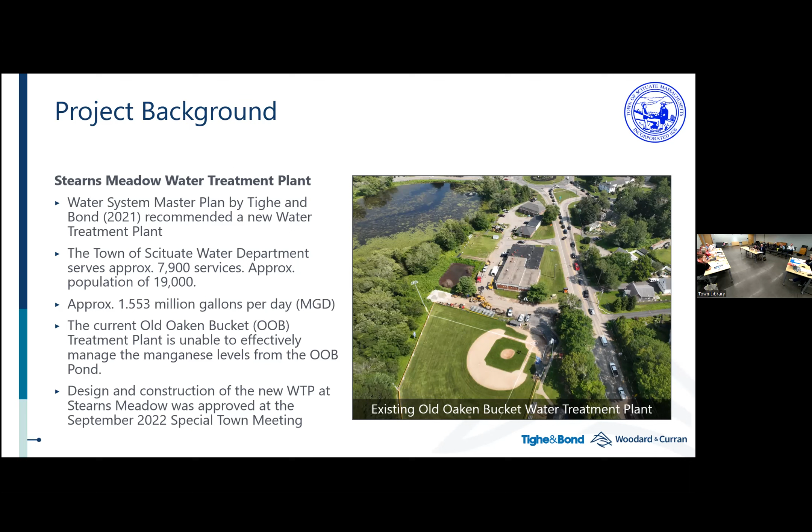Our treatment plant performance objectives: the permitted average flow, and this is for the withdrawal from the existing Old Oaken Bucket reservoir, is 0.79 million gallons per day. The treatment plant design capacity is 3 million gallons per day. What that means is there are some days when we can take more than that permitted average and other days when we'll have to take less. The design is obviously to meet all EPA and Mass DEP water quality standards with appropriate redundancy and resiliency. Included in that is the ability to push kind of a peak flow through the plant, producing that 3 million gallons in 16 hours, and that's to accommodate staffing and also kind of the peakiness, if you will, of the demand in the system.

As a building overview, it's about 35,000 square feet. It has 3 main components: the treatment process area, operations functions, offices, and a 5-bay equipment storage garage. The building itself is also subject to a ZBA special permit hearing, which is at Town Hall tonight.

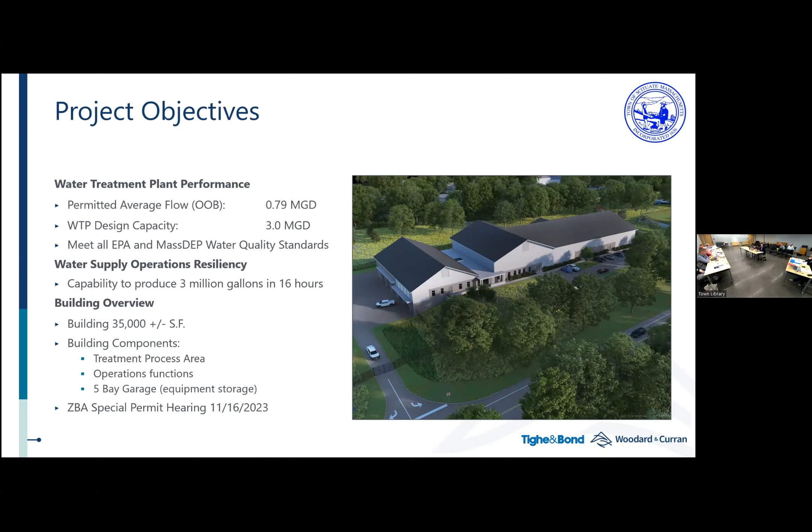We did, and I'll get to this a little bit later as well, look at other revisions to the disturbance in this area, even with tightening up the grading. Right now it's a 4-on-1 slope per Scituate code for this sensitive area. Even if we were to go to 3-on-1, we're still 40 feet from the property line, so we're leaving that grading as it is. That's temporary disturbance during construction with revegetation planned in that area. And this area is quite a distance from the buildings.

In terms of overall timeline, we appreciate the discussion we've had with the public and the board. This is our third public hearing date, and obviously with the quick turnaround here between the October and the November meetings, that's why you have the package that you received today.

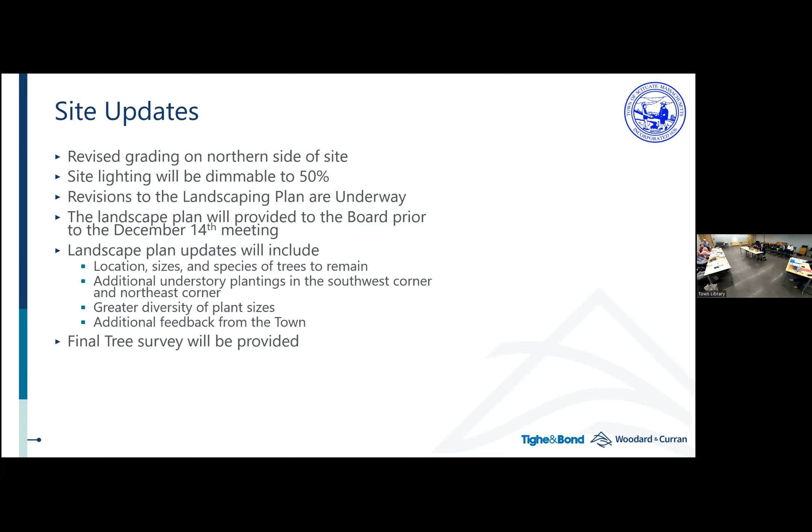Those landscape plan updates will include, again, the location, sizes, and species of those trees that will remain outside of our limit of work, and where we are proposing new plantings that'll include some additional understory plantings, especially in that southwest corner and the northeast corner where our disturbance is closest to the abutting properties. A greater diversity of plant sizes, so it has a natural appearance of woodland transition from meadow to woodland. And some additional feedback in terms of species and composition that we've received from the town. And that final tree survey will be provided. Again, we received that this morning.

That's a summary of the updates that the board sees in a combination of this packet and the next submittal that you will receive, but we wanted to show some of the work that we have been doing in response to the board and public comment.

Yeah. All right, so I did briefly look at the plans today, and I think the major issues for the board, obviously the landscape plan hasn't been done, that's going to be resubmitted. They put in the separate basin for the dewatering. How big is that sump for the dewatering? And so we'll condition that the sump for the dewatering cannot go into the sump for the stormwater. That's fine. How big is the sump though? It's 33,000 cubic feet. And how big is the stormwater one? It's larger.

Okay, that's the temporary stormwater basin there. Okay. And how much dewatering water will there be? That, again, is also partly up to the contractor's means and methods and how much and how deep they want to go before they place the slab and the duration of it.

The soils there are fairly tight. That's part of our challenge with stormwater and why we have the limits of disturbance that we have on the southern part of the site to get the infiltration that we need. So we don't expect that it will be an unmanageable amount of flow. I guess I asked that question last time. It doesn't sound like I got any better answer than last time.

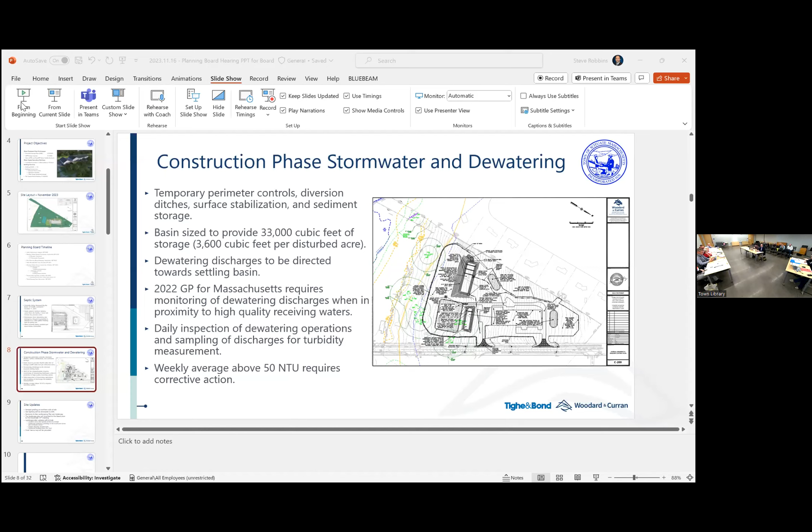Slide, just want to make sure I had it. And this new dewatering sump is in the approximate location of a permanent stormwater feature too? It is. So you're not going to dig in to the depth, you're going to make it shallower? Correct. Is that what you're doing? This area here, yep. Can you blow it up? I'm sorry, my eyes aren't that good. Unfortunately, I don't know that I can in this view, but I'm happy to get up to the board.

This is that dewatering basin, and the overflow conveyance that we're talking about is coming to here. So that looks like a point discharge. How does it get spread? I mean, at 1,000 gallons a minute, that's a lot of water. Sure. We have the outlet protection with the riprap here, and that heads down the slope.

Steve, wouldn't the outflow be limited by pump rate? Absolutely. Okay, so if the pump wasn't capable of over 1,000 gallons per minute, could you discharge more than 1,000 gallons per minute? No. Okay. Can't get to the basin.

So how are you gonna make sure no sediment gets out at that riprap outlet? So the Massachusetts general permit requires daily monitoring of that outfall. It's observed by inspectors on site, and when it's not in compliance, if there's erosion. And I should mention that downstream of that outlet is our silt fence and erosion control barrier for the work. So we're not discharging it freely before it leaves the site. There's an additional level of containment on the site.

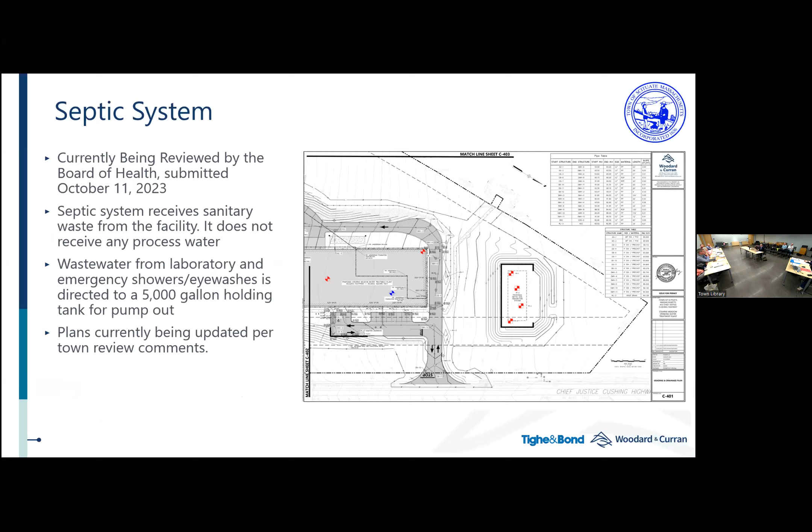Mike Gibson, Milford, 2 Old Forge Road. So the admin building right now, it is a historic building, it's not gonna be knocked down, everything else will. I talked to the town administrator, similar presentation at capital planning, so that's helpful. So the buffer, the non-disturbance zone, you mentioned tonight, Mr. Robbins, that it is possible to do 40 feet down by my house, but we're not entertaining that. I know 10 feet doesn't sound like a lot, but right now I have a forest behind my house, so 10 feet would be a significant difference, a 30% increase from what you've given me right now. So I would be interested to hear more about that. We're more concerned about the buffer right now with 3A than the neighbors. So a couple questions.

My question for the board, last meeting I raised many public meetings where the applicant stated that nothing would be disturbed within 50 feet. It's obviously not what they're presenting now, so I'm curious if the board plans to hold them to the 50 feet. There's a little confusion on that issue. I've talked to the town administrator on this. He said he made no promises for a 50-foot buffer. Some of this was done before the actual design of the stormwater system. There is no requirement for a buffer in the bylaw. There's a 30-foot building setback, and they're not going in the 30 feet except where the cemetery is. The town administrator said he did not make that promise, and it was before the building was fully designed and the stormwater system was designed.

No, I'm aware of this, nothing will be done within 50 feet. So no one went back and looked at the recorded meetings that I mentioned. I gave some quotes, they were direct: nothing will be done within 50 feet. I sent an email to the town administrator and asked him to comment, and he told me he made no promises that it would absolutely be 50 feet. He said they would do their best to make as big a buffer as possible. Okay, so it's July 13th, 2022, August 23rd, 2022. I sent him the times that you said. I'm aware, I'm providing it for the board in case they want to look as well, because Rob Little from Woodard & Curran was another representative who made those statements. I'd like to know what's gonna be done with those comments.

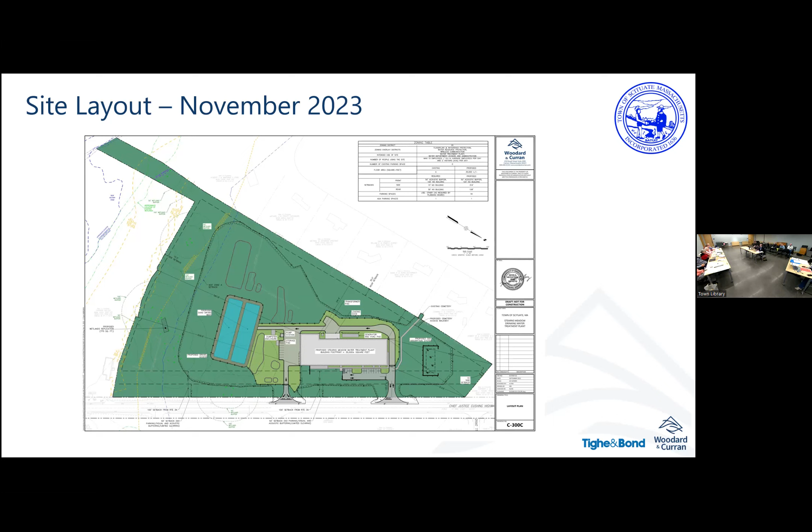Could I just ask a question, because I'm going back to the difference between 30 and 40 feet. Remind me what you said would have to happen to get to 40 feet from 30. So the grading in that portion of the site is designed with a 4-to-1 slope, which is what the town requires in the watershed protection code. So you'd have to make it steeper. Yeah. That's how you tighten up that slope by a few feet, but it requires the grading to not comply with town code. And that's right in the zoning bylaw, that it's supposed to be 4-to-1. No, I don't think we want to change that.

Can I ask one follow-up to that? Sure. Is it possible to push it 10 feet closer to 3A? Push the design? No. Not without increasing the slope to 3-to-1 on that side instead. Or, let me get back to that, I don't know if I have.

I don't have it. Did we ask Mr. Kasha what happened at his meeting? No? No. Okay, never mind. So anybody online, no? I don't see any hands online. Do we have a piece of paper that says continuing? You do. Are you all done?

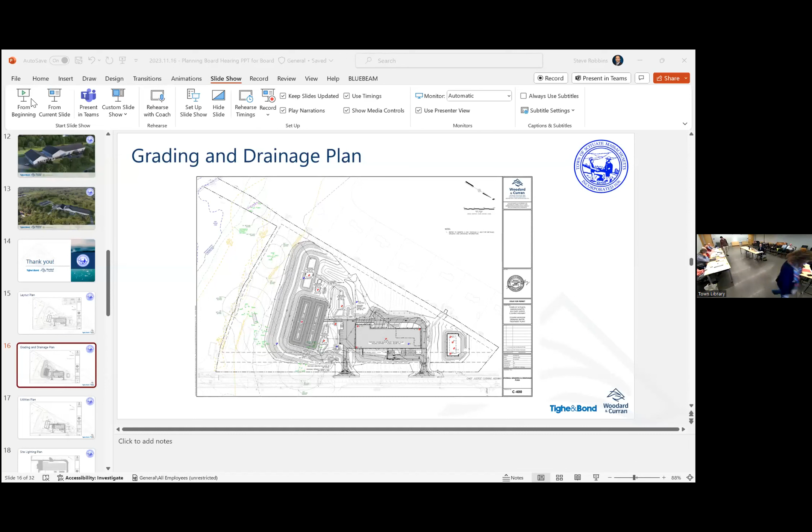So the next contested area is just on the western side of the site where the limit of work goes to the 30-foot buffer. So that's 30, and the limit of work comes almost perpendicular to the elevation lines. How does that then change the overall grading of the site if you're pushing away from the abutter's property by 10 feet to make it 40 feet, or 20 feet to make it 50 feet?

Can you repeat that? I just want to make sure I'm following the question. Well, so the limit of work, that's kind of in question. I'm gonna point up here just so I'm making sure I'm following. This area here. Yes. Because if you push the limit of work closer to the proposed infiltration pond by 10 or 20 feet, it's running perpendicular to the elevation lines. So how would that then change the grading of the basin, the site?

Because then we would have to tighten up this slope to be able to meet those existing contours. Okay, so these elevation lines are pre-fill elevation. The gray within this area is existing and the darker is proposed. So if you move it forward, in order to keep the same basin, you've gotta have a steeper slope to tie into the existing grade. Correct. If I pull this back, then I have to meet those contours further in from the site, and I have to increase the slope.

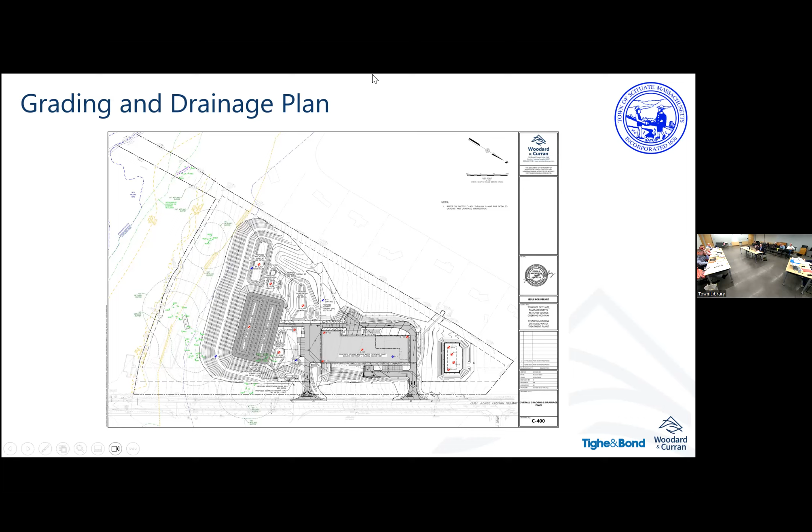I move to accept the applicant's request to continue the public hearing on the site plan administrative review and stormwater permit for the Stearns Meadow Water Treatment Plant at 453 Chief Justice Cushing Highway until December 14th, 2023 at 6:30 p.m. and to continue the time for action for filing with the town clerk until December 22, 2023. Second by Rebecca, all in favor? Aye. Thank you.

So given that we're looking at a decision on the 14th, can we just make sure we get this other feedback, particularly on the dewatering and all that, long before that? I'll push for it. As soon as we get something, we'll send it out. We'll send out the electronic file of what came in today, tomorrow. And then as soon as we get other information in, we'll send it out. And I will send you a draft decision before the meeting as well.

I think the goal should be that there's no last minute surprises on the 14th. There can't be any last minute surprises on it. Right, because we won't address them, and then we'll have to kick the can down the road, right? We can't do that, we don't have that kind of time. Not our expectation. If we're not able to get it to the board in sufficient time, then we're back in January.